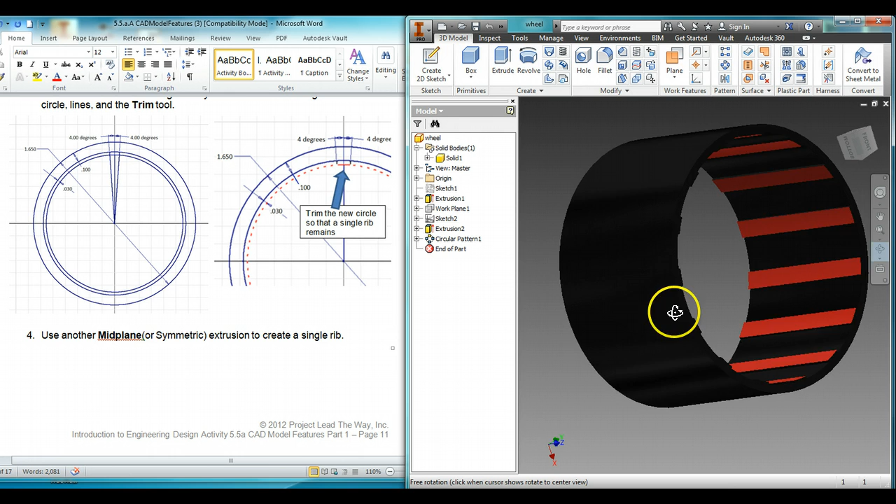We are going to take a little bit of time and work on this wheel right here with extrusions on the inside. They're not just painted red, they are actually .030 extrusions. So let's go ahead and get started with that.

Just like everything else, we're going to start with a new part, create a 2D sketch, and this actually begins with circles. I am going to draw a circle 1.65, and then my dimensions say that there is a secondary circle 0.1 inch away. So 1.65 minus 0.1, and that draws my circles.

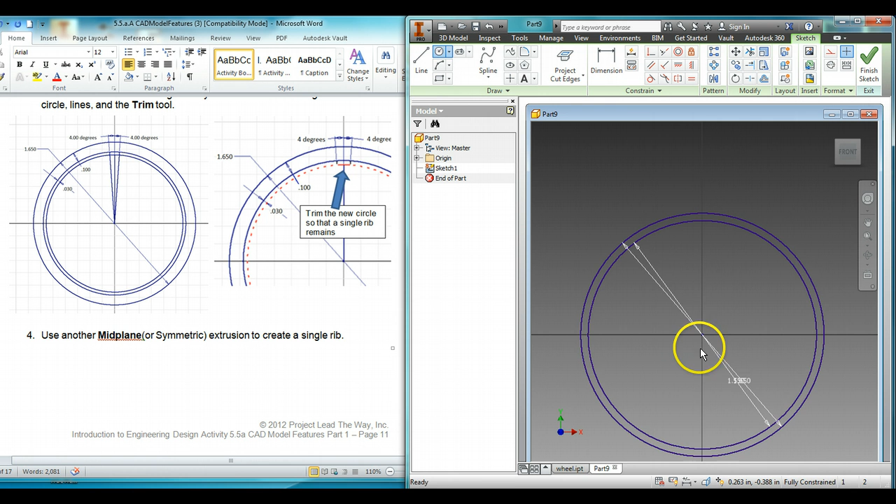From here, finish the sketch, and I am going to extrude it out 1 inch, which is exactly what I want.

Now that I have this extruded, I'm going to expand the extrusion, right-click on the sketch, and click on Share Sketch. That treats it not as a finished part, but as a work in progress.

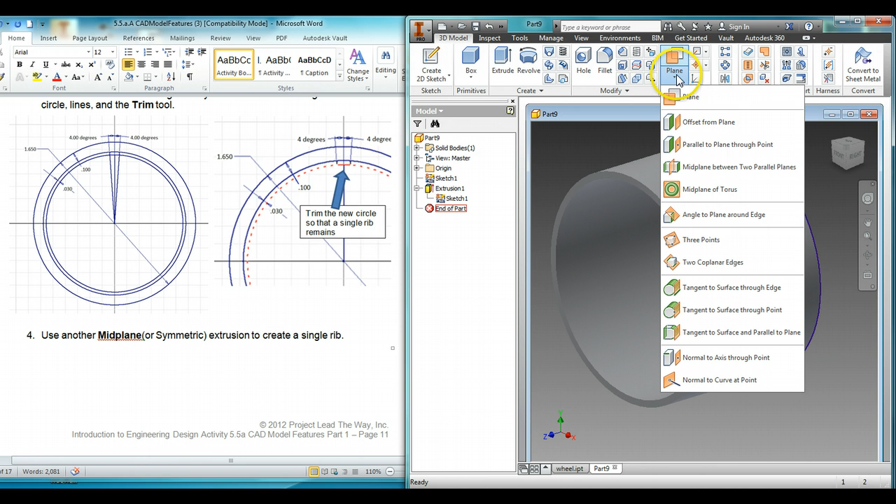From here, I've got to put on a plane, basically an imaginary surface on this. So I am going to click Offset from Plane, expand my origin folder, find my XY axis, and offset at 0.00. So right there now, I have a plane installed, and you can see it's highlighted.

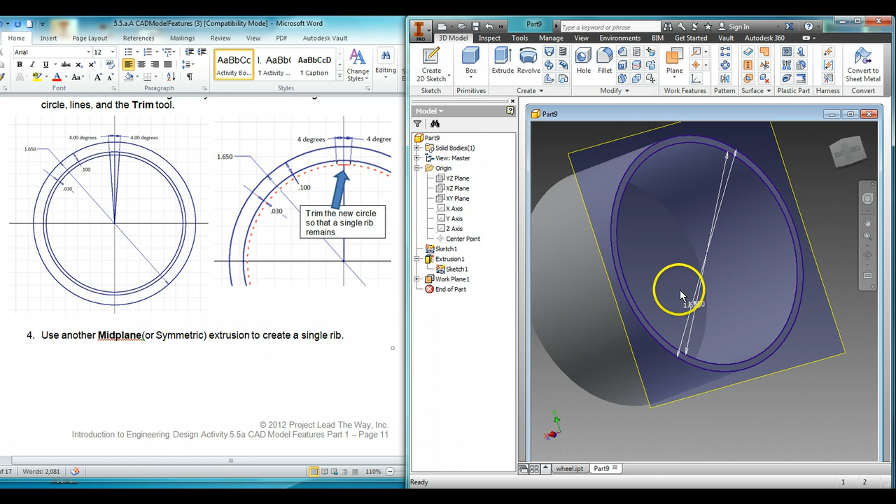I want to create a 2D sketch on that plane, and it flips it around back to the front. I'm going to turn this to the back because I usually like working, drawing this particular part from the back.

Now I have to go to Project or Project Geometry. Click Project Cut Edges, and you can see that now I can select things, which is a very good thing.

From here, I've got to do a little bit of work. I have to initially draw some angles right here. So what I'm going to do is first put in a secondary circle, from here out, the same interior measurement, which is 1.65 minus 0.1. And that puts another circle in there.

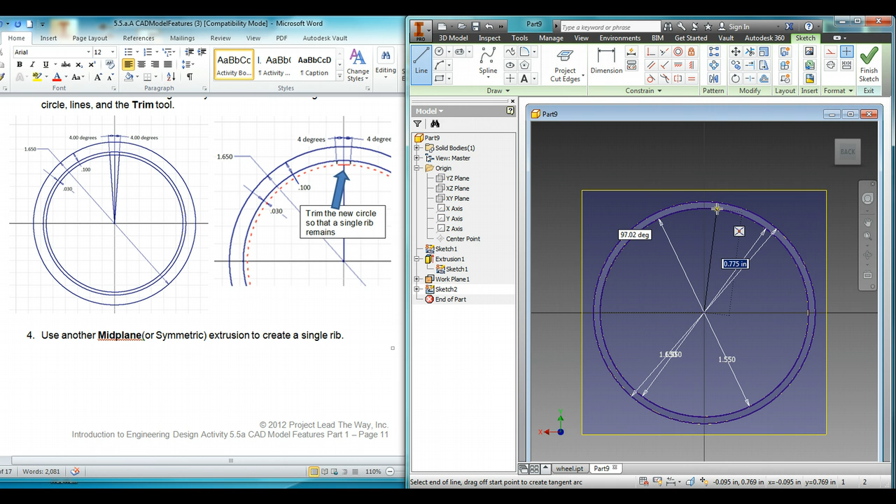From here, what I'm going to do is draw some lines to that circle that I just drew. And you can see a coincident constraint right there. Instead of entering a length measurement, I'm going to enter an angular measurement. So hit the Tab key and enter 96 degrees, and it pops right in there.

Another line, and hit the Tab key, 86 degrees. Whoops, let's try that one again. There you go, hit the Tab key, 86. There we go, so now I have

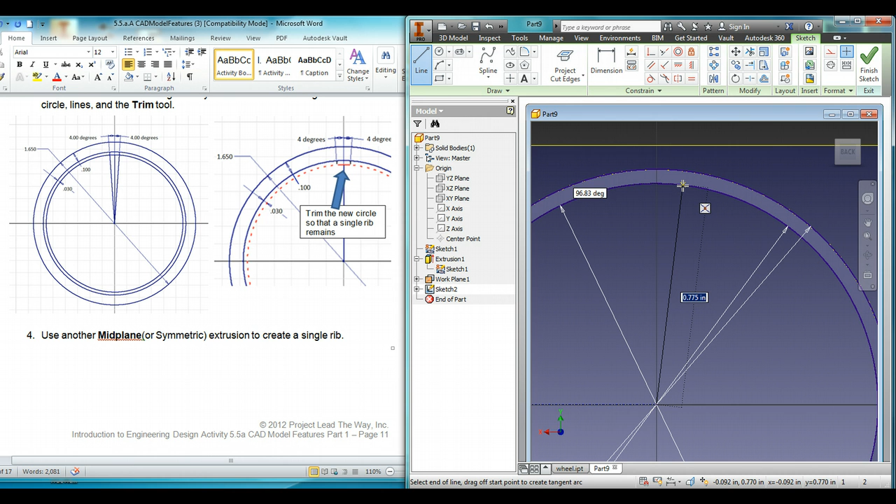an angle put in there. I just deleted that, my angles were off, I did my math incorrectly. Hit the Tab key, and it's 94 degrees instead of 96, and then 86 degrees. There we go, now that is even, which is a good thing.

We can now do a little bit of trimming here. So I can click on my trim, and I can delete that, which takes it all the way around the circle, but leaves a little interior circle part right there.

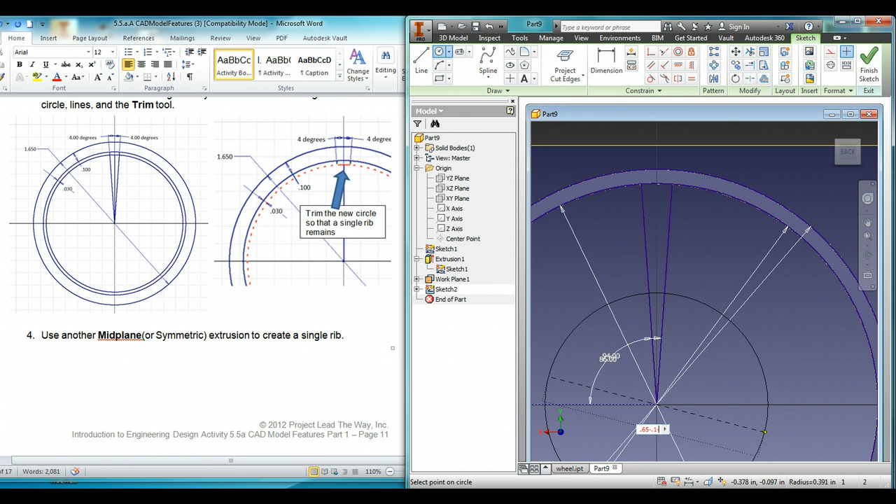Now I need another circle from the midpoint, which is right there. And I'm going to let Autodesk, or Inventor, do the math for me: 1.65 minus 0.1 minus 0.030, which are all the dimensions right here. And that pops out just a nice little circle around there for me.

Now I'm going to trim this, so I am left with that small amount. Trim here, trim there, so now I'm left with just sort of a square right there. And I'm going to click Finish Sketch.

Now that I've finished the sketch, it's time to extrude that little piece that I just drew. So click Extrude, select that, and it's extruded 1 inch, just like the rest.

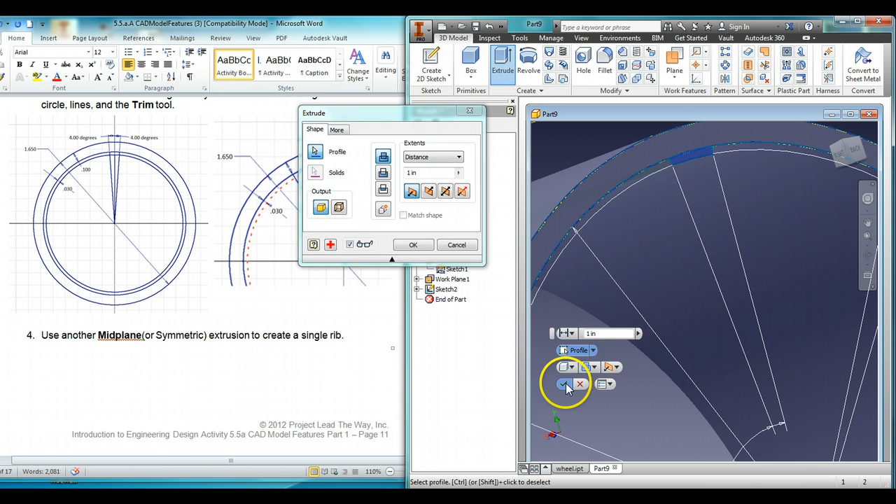Let me rotate this around, and you can see that it is right there. Now that I have that piece extruded, just check it around to make sure that it's there. And you can see right there, it is there.

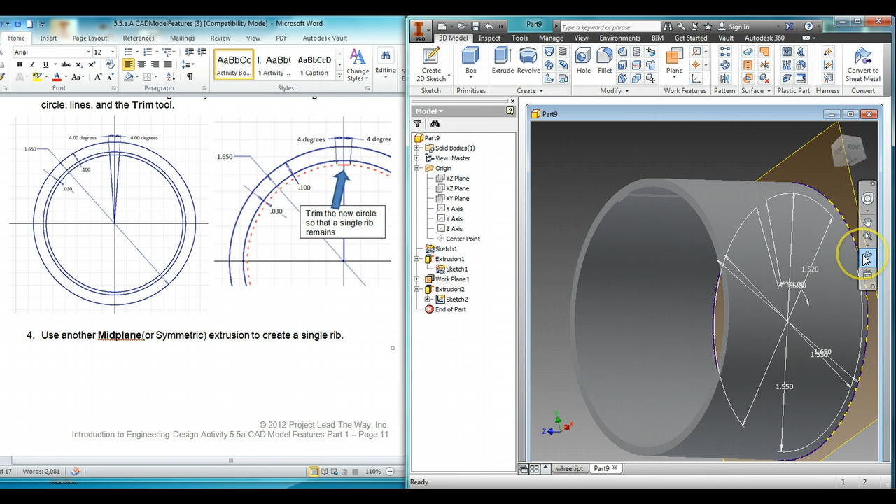Flip back to the back, and I have to share my sketch too. So click on Share Sketch right there. That way, it still tells me that it's kind of a work in progress.

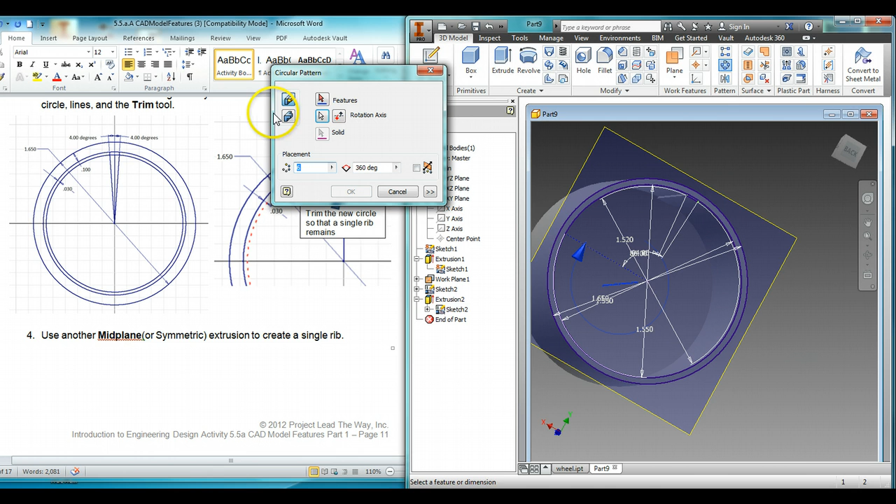Using the circular pattern, I'm going to click Rotation Axis and click on the outside. You can see I've got a nice spiral going right there. I'm going to click Feature and zoom in on my extrusion right there, and I'm going to say I want 15 of those. And you can see they pop in right there. Click OK, so now I have 15 small extrusions around the inside of that.

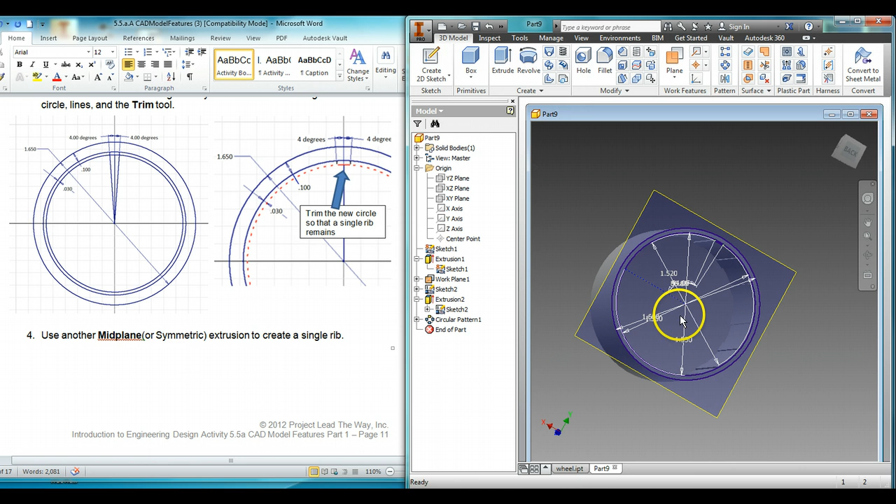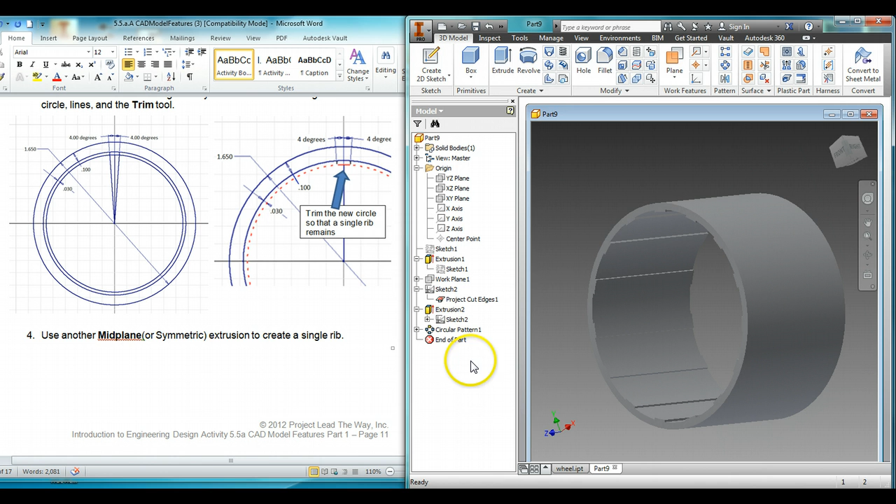Flip it around, make sure they're all there, which they are. Now I can take care of the visibility of these lines. Going to Sketch 2, click off Visibility. Go to this sketch, visibility. Let's see where else. There we go, visibility for that. So now I am left with this.

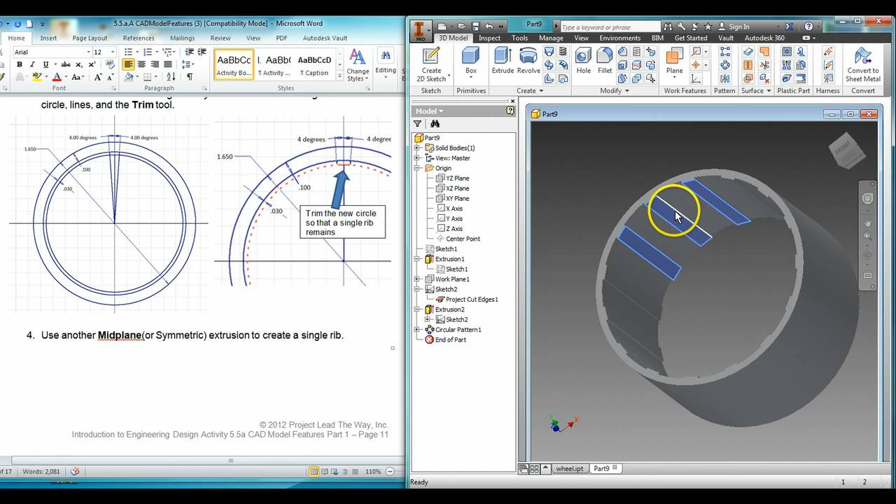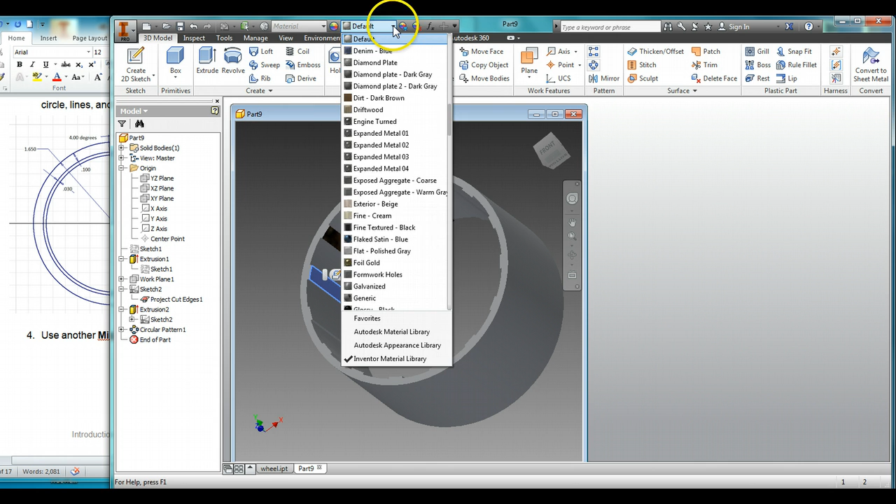Now let's say you want to change the color of some objects, but not all of them. What you can do is hold down the Shift key and select multiple objects if you'd like. Like I have selected these 3. Those are selected, and now if I wanted to, I could easily change the colors from default to, say, dark brown. I can change it to different colors just by using the Shift key and making it as such.

Okay, so this is kind of a complicated concept. Go ahead, stop this video, rewind, and replay as many times as you need in order to get this part done.